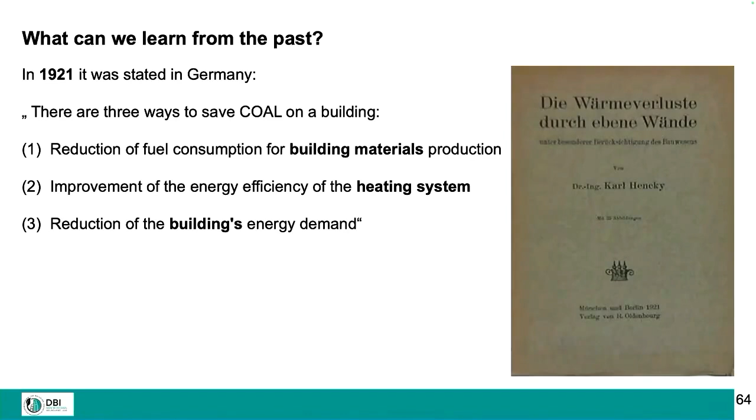But the question is now, what is new? If we go back to 1921, you can read in books in Germany, if you like to save coal, you have 3 options: use less coal to produce construction products, improve the energy efficiency of your heating system, or reduce energy demand of your building. 100 years ago, and construction products, so-called embodied impacts, are in place number 1.

In a certain way, we are always following a crisis. After World War I, there was a scarcity in coal, so we calculated with coal. Later on, there was the oil crisis, so we used oil equivalent. Later on, it was all about primary energy, non-renewable. And in our days, we are talking about global warming. So we can ask ourselves what will be the next crisis and what will be the next indicator. I think we will soon see raw material consumption.

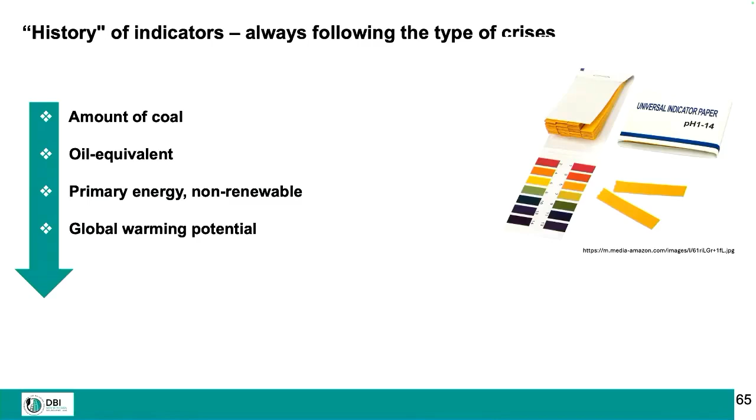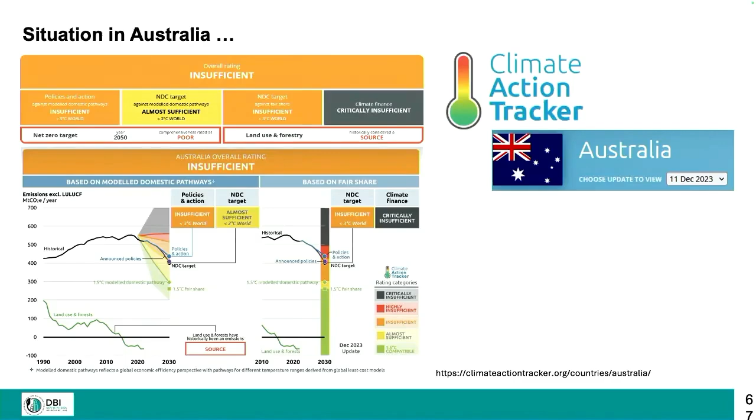And we are not on track. This is very clear, I must not tell you this. I am also not coming here to talk about problems in Australia. I'm coming here to explain the problems in my home country. So we are also not on track.

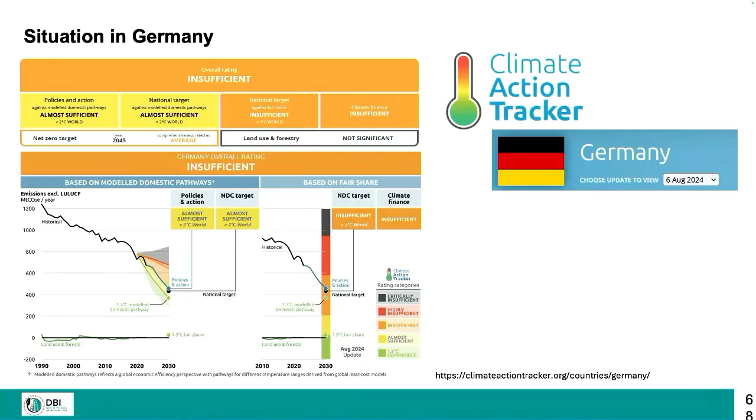This is the overall situation, and we are here representing a so-called sector, but I prefer the term area of action, because sector is a tricky term if you ask our colleagues from macroeconomy. There is no building sector in macroeconomy. We can talk about construction and real estate industry, or area of action, or area of needs like housing.

So in a certain way, we are the elephant in the room, the construction and real estate industry. Let us take the old term from the Beatles, with a little help from my friends. So we are the friends of the society because we have the potential to help by reducing greenhouse gas emissions. I'll come back to this in some minutes.

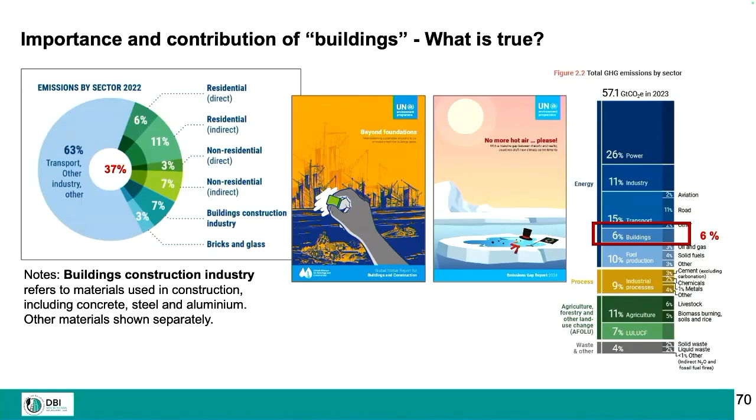But there is a certain problem of awareness. The same organization is telling us, construction industry is contributing 6% to global warming on the right-hand side, and on the left-hand side, it's close to 37%, including direct, indirect, and so-called embodied greenhouse gas emissions. So what is true? Most politicians know the figure on the right-hand side, saying construction industry doesn't matter much, let's take care of chemical industry, mobile industry, heavy industry, but just pour some buildings, it doesn't matter. But we can have impact. Let us not say we are not responsible. I dislike this. We are responsible for 37%. We can make an impact on 37%, and this is our role in this game.

But, dear ladies and gentlemen, there is a certain problem. Policymakers like to come out with years. And there is a race around the world, 2050, no, 2045, let's take 2035. But this is more or less fantasy. In reality, we have to follow the budget.

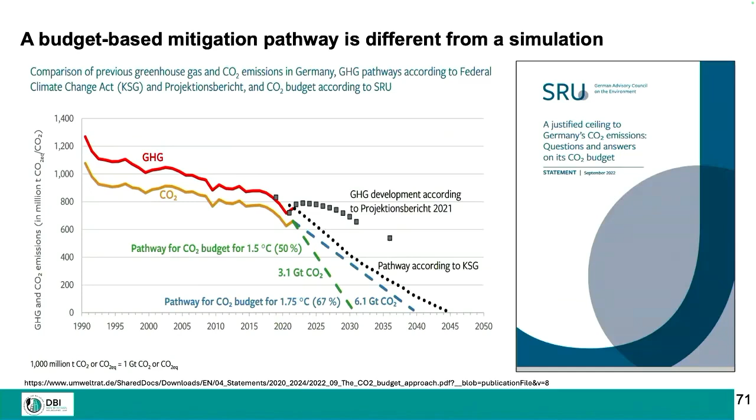This is a science-based approach, and we are here the researchers, so we should trust a science-based approach. And now, surprise, our budget is over, not by 2050, but by 2032. What happens? We have to speed up, ladies and gentlemen. It's a nightmare to say, let's take our time up to 2050, we go slowly, improving the methods, improving the data, improving the knowledge. But in a certain way, in 5 years from now, we have to come out with good results. This is our problem. We have to speed up.

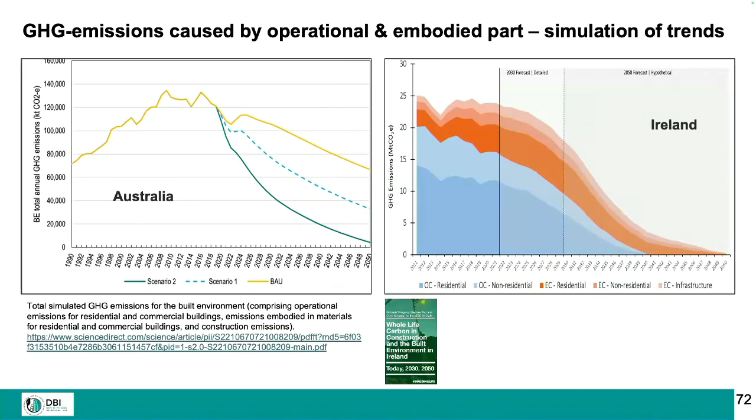And in Australia and in Ireland, take this as an example from Europe, we're doing things like this. We call this a mitigation pathway. But I'm not so sure this is a mitigation pathway we are talking about here. I'm sure this is a projection, a forecast, and not a mitigation pathway. By the way, on the left-hand side, Australia, this is just one example out of literature. If you like to see better examples, ask my friend and colleague Greg and his colleagues, his younger colleagues. They are working on this, and I really recommend his model. But at the very end, we must make a difference between a mitigation pathway and a projection.

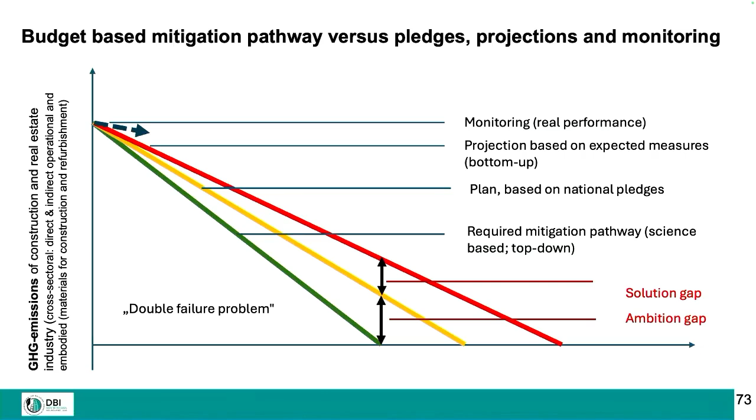This is a top-down approach, taking into account the budget. From the other point of view around the world, and at the moment we are right in time looking to the COP, yes, there are a lot of pledges, nice pledges. But at the very end, you can take a projection, and later on you will follow the monitoring, and always you will see a gap. First of all, there is an ambition gap, and later on there is a solution gap. In Germany, we call this double failure problem. At first, our targets are not strong enough, and secondly, we are not able to meet our targets. This is double failure. So again, we must be more powerful to solve our problems.

By the way, in Europe, there is a new law, a new requirement. If you talk just about climate friendly without showing figures, there is a legal risk, because now greenwashing is a legal problem. So please be careful if you come to Europe and give a speech about climate friendly buildings. You have to show the figures.

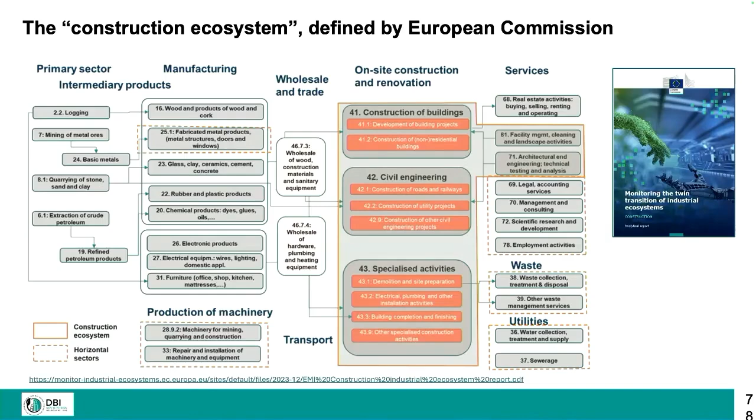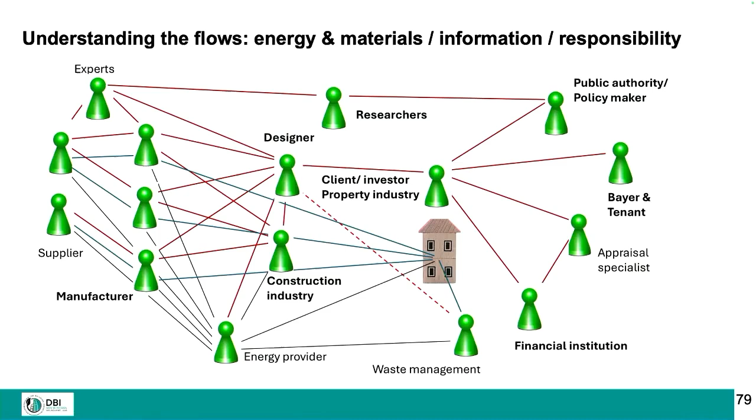So from my point of view, we should enlarge system boundaries to integrate all the actors and stakeholders taking the decisions. Therefore, in a certain way, perhaps it's better to talk about built environment professionals or things like this. In any case, it's a network of actors, and we will see a mass flow, an energy flow, but also a flow of information among the actors along the supply chain. There's for sure also a network of responsibility, and it's really necessary to fully understand this network.

We can also follow, on the left-hand side, the famous modules to describe the life cycle of a building. And we can add to this what type of industry is included: construction product industry, transport industry, construction industry, and so on. We have to fully understand all this, and everybody can contribute.

But who makes the impact? First of all, the consultants and the designers. But this is just the surface. In many conferences we discuss how we can convince the designers. But from my point of view, a more important question is how we can convince the clients, the sponsors, the owners, the investors, because they have to ask for low carbon building, they have to pay for low carbon building, and they give the tasks to the designer to create a low carbon building.

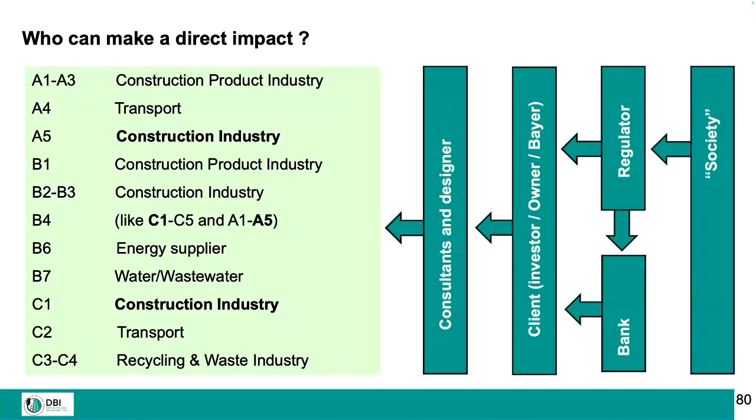But this is not the last line. Behind the investors, there are the banks. And translated into the bank world and language, unsustainability is a risk — a financial risk. And there are the regulators, and behind this, there is the society.

There was research done by Deutsche Bank in the past called 'Some Like It Hot.' This was a famous movie in the past. Perhaps most of you are too young to understand this joke. Nevertheless, I think it was related to Marilyn Monroe, far away in the past.

Look, construction and associated sectors can become double winner if we are clever enough, because what we need is transformation of national building stocks. If we do it right, and if there is a certain willingness to pay and willingness to act in society, this will create jobs. This will create income for construction and real estate industry. So if possible, we become winners.

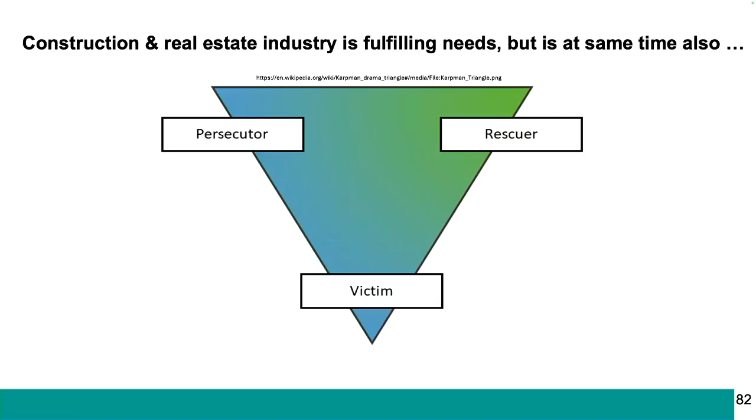We are in a very specific situation as a group here. We are the persecutors because we are causing energy and mass flow and impacts to the global and local environment. We are victims because we are already affected by the impacts of climate change on a local level. But because we have an impact on the 40%, we are rescuers also. Let's try to become a zero hero in society, the building sector.

So there are advantages from different perspectives — for the companies, but also for the buildings, and at the very end, for society. You can see here in Europe they now have a so-called Eurobarometer, and you can see on the company level, most companies, especially small and medium enterprises, are highly motivated in energy saving, minimizing waste, saving water, and others.

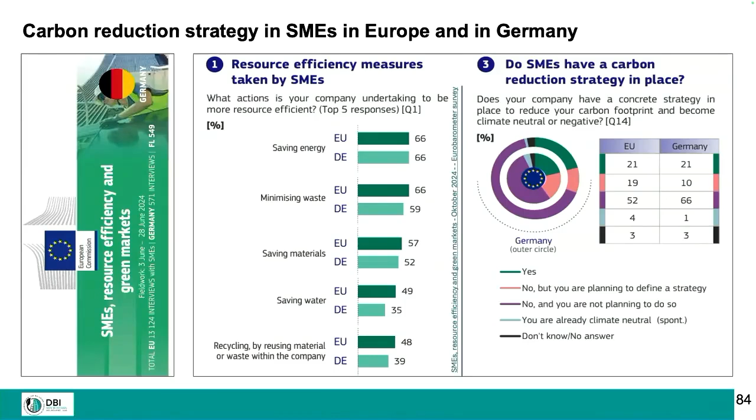Sometimes it's not enough to show the advantages to motivate people, to say green premium or not, I have enough income. So in a certain way, we should try to show the risk, because you make the real estate people nervous if you come out with the message that you will lose money. We call this brown discount.

So green premium is one thing, but brown discount is the other side, to say, if you have a high carbon building, an unsustainable building, this will create risk, but also financial risk. We call this brown discount.

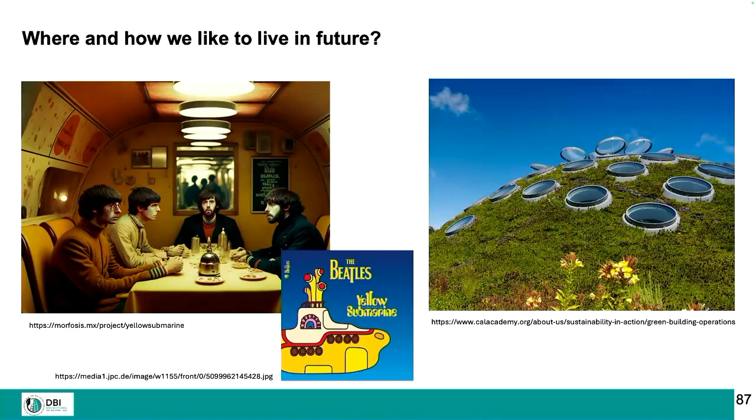And for sure we have to ask the people - if we have climate change in the future, perhaps we have to live in yellow submarines, but most people prefer to live in green buildings. But there must be a very clear language.

If you look to Europe, we have competing initiatives. One is zero emission, and the next one is zero emission. One is about greenhouse gas emissions, and one is emission on construction sites. This is not the same, but the same terms. You can see there is really a source of crazy mixtures of different terms.

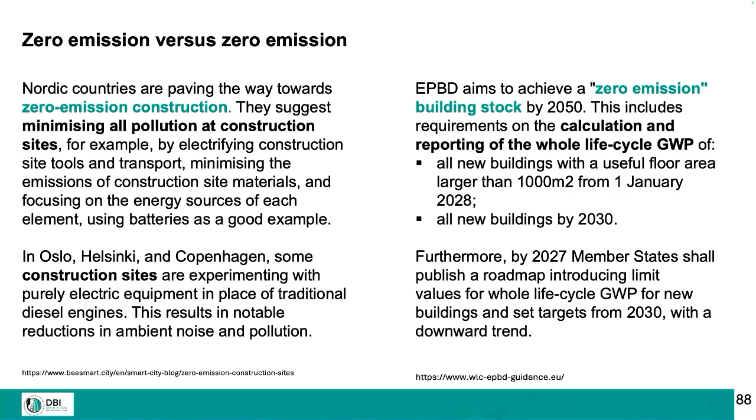So we really need clear terms and definitions to have a better idea of what we are talking about. And there is a new game around the world: let me coordinate all the others, because we need a harmonized approach. Different organizations at the moment try to come out with harmonized approaches, but who will harmonize the harmonizers?

You can see, typically if we talk about assessment methods, we have to talk about the modules, when to carry out the assessment, what is the reference study period, and things like this. And at the minimum we should fight for more transparency. There is also a good job sharing between legal requirements and standardization.

This too I recommend you learn from Europe - this job sharing, to say the legal requirements are on a more generic level. And for the engineers, all the details are part of a standard, because it's easier to adapt a standard than to adapt a legal requirement. So a legal requirement would be a framework.

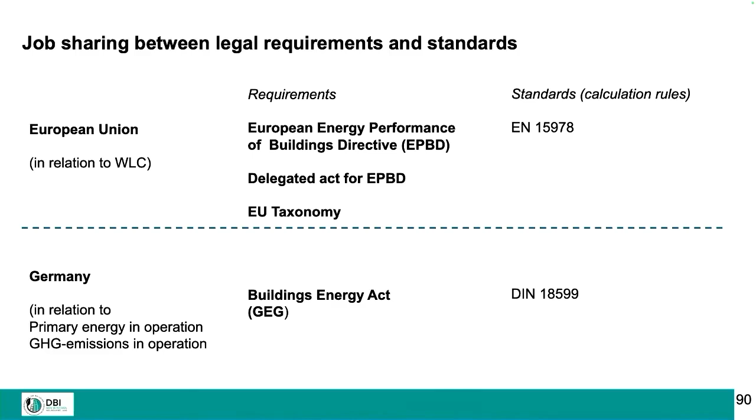And in Europe we will have some frameworks like this, especially the so-called delegated act, on how to calculate greenhouse gas emissions. But by the way, we can also learn from Europe: just reducing greenhouse gas emissions is not enough. We have to do this, and this was already mentioned by you, dear colleague.

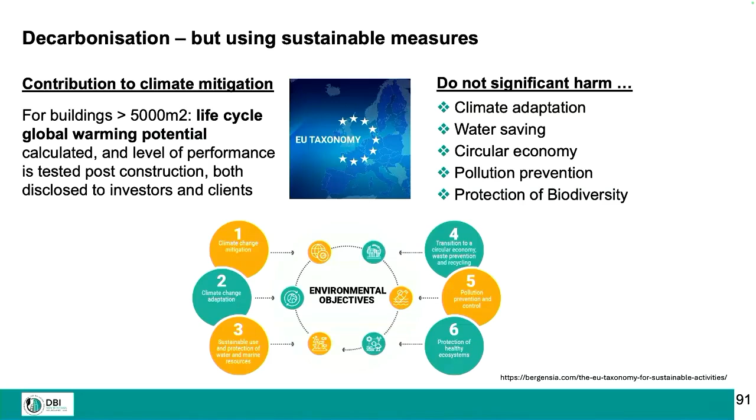We have to enlarge the scope, and include also the other perspectives, and say at the minimum climate mitigation is okay, but do not significantly harm adaptation, water saving, circularity, pollution prevention, and the protection of biodiversity - and we can enlarge this further.

By the way, dear colleagues from Australia, we miss you, because Greg, my friend, is here but not representing Australia. He is representing our iiSBE, the International Initiative for Sustainable Built Environment, the most powerful phantom organization in the world, able and ready to put on world conferences. The last one was in 2008, here in this town, coordinated by Greg.

So you see, it's all about standards and certification, and this is what we are talking about here also. It's all about demand creation, finance, and investment. It's very similar to your list of topics at this conference here. Again, we miss you, so it's not too late. The main activity will start next year in front of COP30.

At the very end, climate action is not enough, let us say, and this is also true for Buildings Breakthrough. Buildings Breakthrough wants nearly zero emission buildings, resilient to the new normal, but not by 2050 - by 2030. This is now at the international level, to say this is a self-commitment, to say let us speed up to achieve such a goal already by 2030.

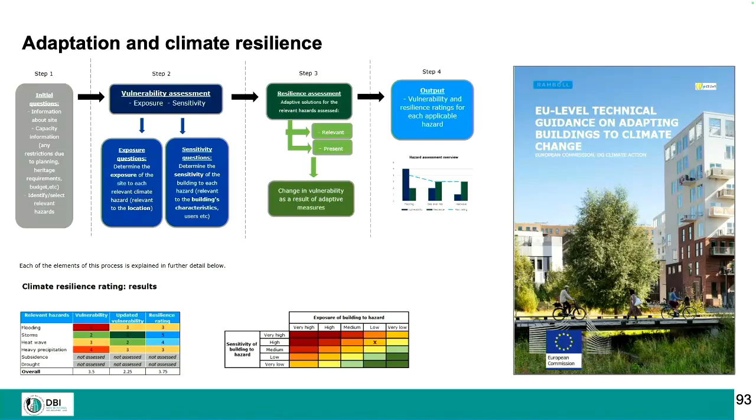So, ladies and gentlemen, what's next? We should, as researchers, already be two steps ahead of the actual list. You perhaps are surprised by my first line, but if you look at the economic and environmental value of the existing national building stock, you should take care.

You should maintain the environmental and economic value of the existing building stock. We need more regular maintenance. You have heard about Germany.

Bridges breaking down and falling into the river in a country like Germany - what a disaster, what a shame. Therefore, we need more maintenance and refurbishment.

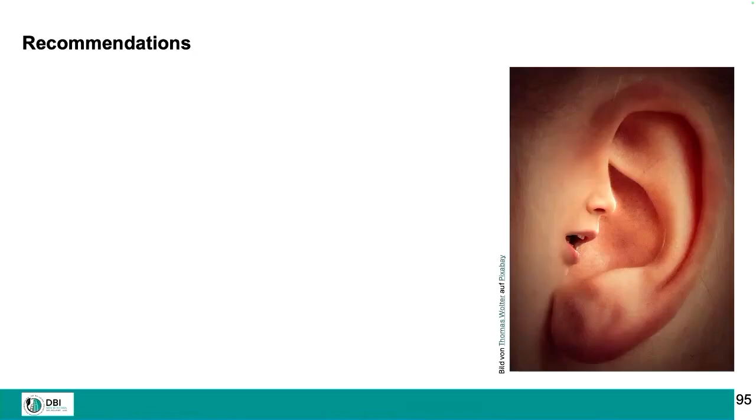And the next topic will become circularity, and some final recommendations. We must communicate the importance of the construction and real estate industry. We should go to the polluter-pays principle, because in national statistics we are source-based and not polluter-based.

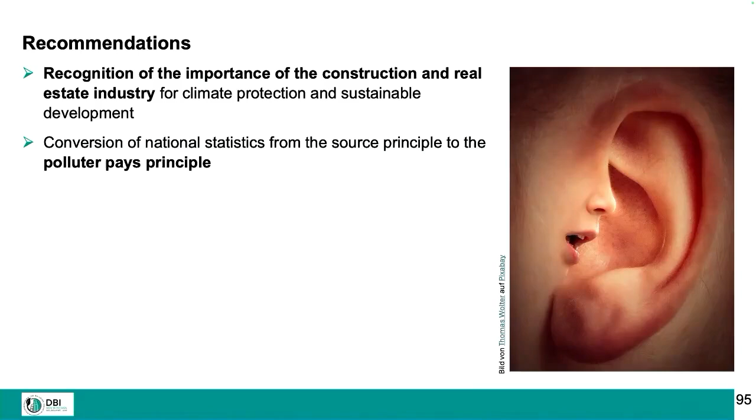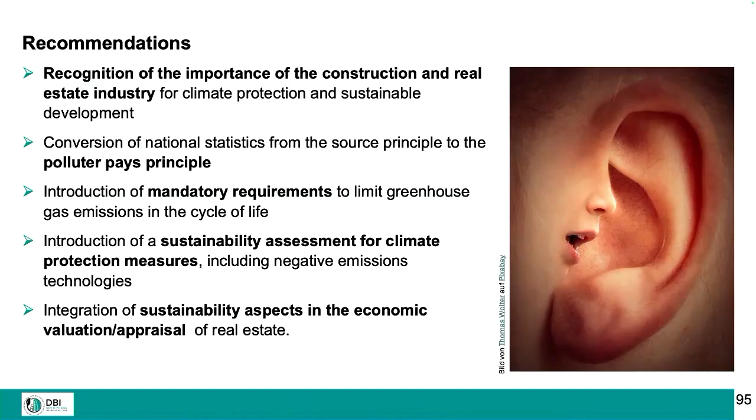We have to come to mandatory requirements to limit greenhouse gas emissions. We have to undertake a sustainability assessment for climate protection measures to see advantages and disadvantages. At the very end, we must integrate this into the appraisal process, and we should improve the digital information flow. In this case, the building industry can become a rescuer and winner.

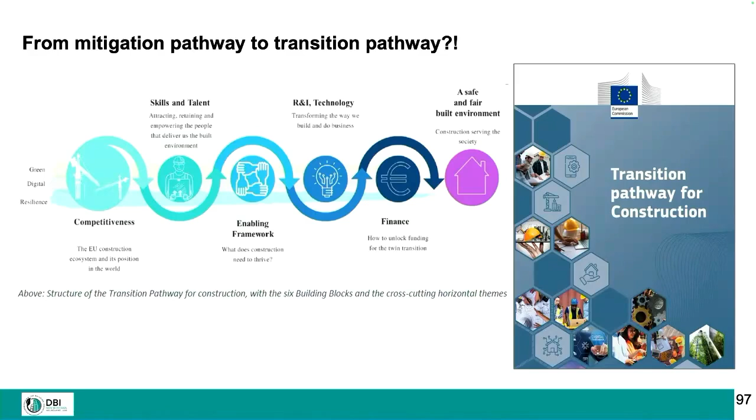But a final remark: this is not the only target. We should go from a mitigation pathway to a transition pathway to achieve, at the very end, a safe and fair built environment. And this is just much more than climate neutrality. So this is our long way.

And I will hand over to Harper now, but allow me a small joke: if we are able to achieve this target, we can show each other our personal SDG flag. I get this especially from my kids to motivate me, and so I like to motivate you. Thank you.

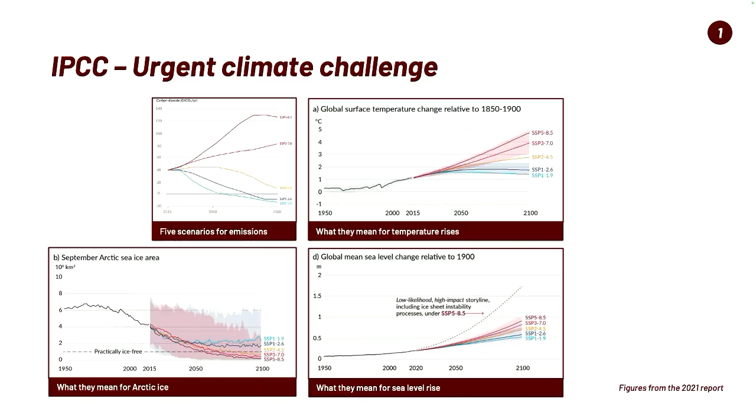We know these are serious scenarios we are looking into - scenarios that have always seemed far away in the future. But what we are facing now is that they are not that far in the future. During this time there have been a lot of actions or discussions, but not resulting in enough action to change the curve.

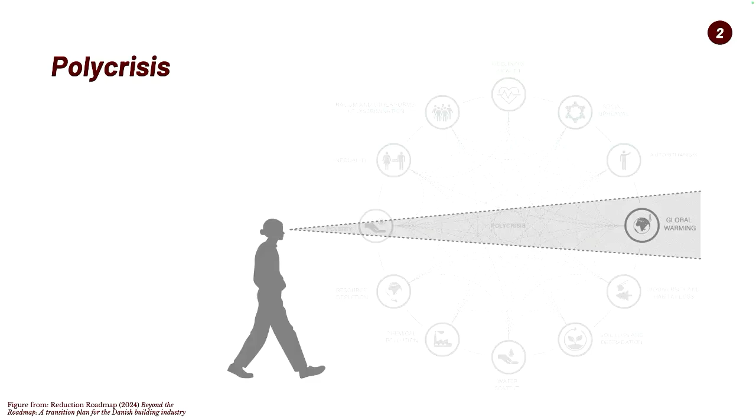While we are looking at this climate urgency, which is quite complicated, our ecosystem is much more complex, and we need to make sure we don't only focus on climate but also on other environmental aspects. Therefore, the planetary boundaries have also been introduced, and we look into the health of the whole ecosystem through them.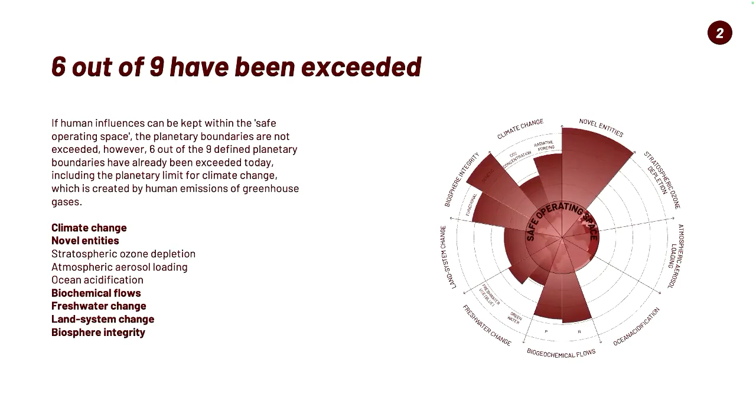To maintain the health of our ecosystem, we need to keep our human activities within the safe operating space. But as of now, 6 out of 9 planetary boundaries have been exceeded due to our human activities, and we need to look into possibilities for how to reverse this and stay within the safe operating space.

The planetary boundaries, as defined today, are very good, but they do not totally cover our resource use. One way of trying to illustrate and measure our use of resources is the Earth Overshoot Day, which looks at the use of natural resources and how much we are using.

We should be using the amount of resources that keeps our planet in balance. In Denmark, the Earth Overshoot Day is March 16th this year - 12 days earlier than the year before. In Australia it's April 5th, and globally it's August 1st. So after 7 months of the year, we have already used the amount of resources we should use for a whole year to have a healthy, balanced planet.

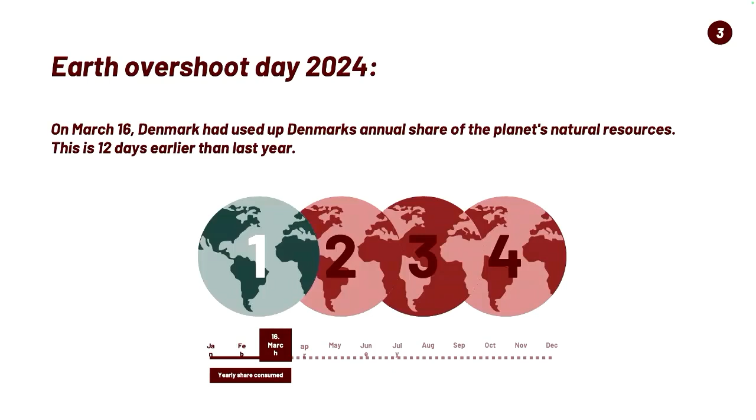Also, in Denmark we already have legislation for new constructions on the climate issue, so you have a ceiling on the embodied carbon or whole-life carbon you can emit from new constructions. This is a recent legal requirement in our building code.

Being among the first countries in the world working with this, perhaps you could say we are a little bit ambitious, because it's ambitious to set limits on how much carbon you can emit from buildings.

It is ambitious to work on reducing your emissions compared to what you have been doing when you're building as usual. But when we look into our emissions from buildings and compare it to the budget we have for construction to fulfill the Paris Agreement, then even with ambitious requirements like in Denmark, we are exceeding the Paris Agreement budget for buildings by around 220%.

So although we are not on track in Denmark, I'm very thankful that I can still be invited to tell a little bit about our whole life carbon journey for the building sector in Denmark.

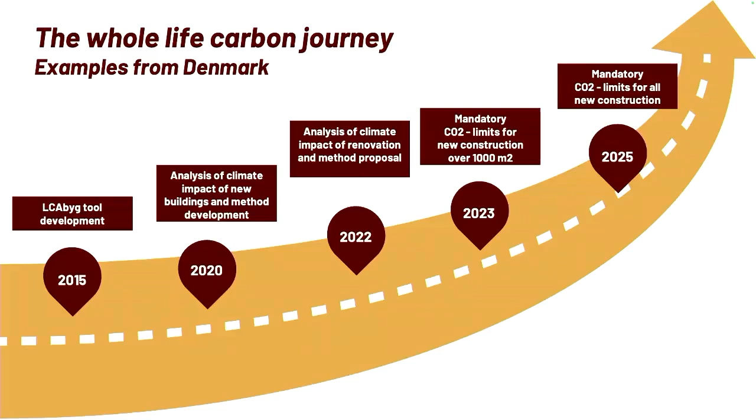In the past, there has been a lot of focus in Denmark on reducing energy consumption in buildings, with ambitious requirements for energy use. Over the last 60 years, there are really good results in these requirements. I won't discuss further how people tend to use more energy than intended once they use the building, but let's keep that aside.

But now the focus is on the entire life cycle of a building. Looking at how this has happened in Denmark, it has been like a 12-year journey with focus on life cycle assessments in building.

Around 2011-2012, the Green Building Council in Denmark was established, as happened in almost all countries. But what was chosen in Denmark was to use the German certification system for buildings, the DGNB system. What was special about that compared to many other systems used in Green Building Councils is that you have to conduct a full life cycle assessment of the buildings.

So for about 12 years, there has been experience with the use of life cycle assessments in some parts of the building industry in Denmark. Not all, but a lot of data have been gathered.

There have also been initiatives from the government. First in 2014, there was an ambition to introduce a sustainability class in our building code. This was a vision, but it also meant we started developing a tool for LCA of buildings, and we launched LCAbyg, our national tool to make LCA of buildings.

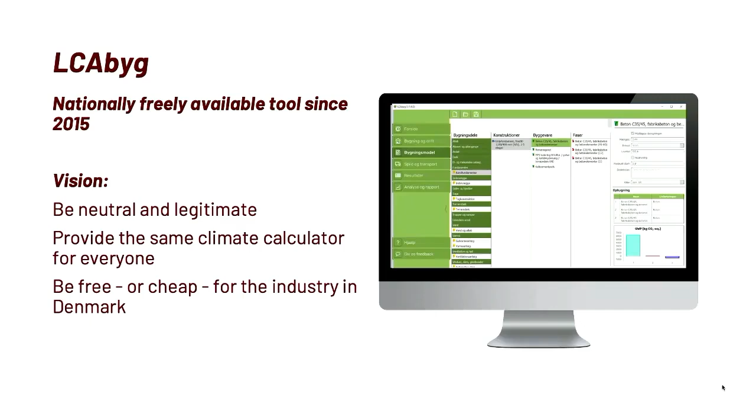Also, what has been important for us is to gather knowledge on the climate impact of new buildings. A lot of focus has been on new buildings, and one of our tasks at the university was to establish sufficient data background on climate impact of buildings in Denmark over the life cycle, to prepare for these legal requirements that had been introduced.

So in 2020, we had this report with 60 building cases. It doesn't sound like a lot now, but at that time it was quite a lot, also when you look internationally.

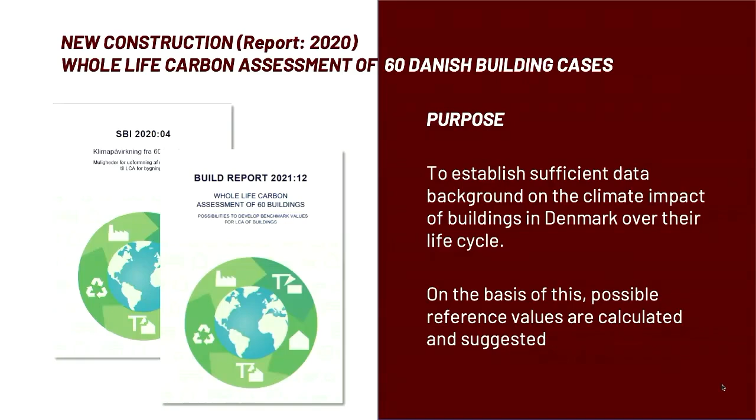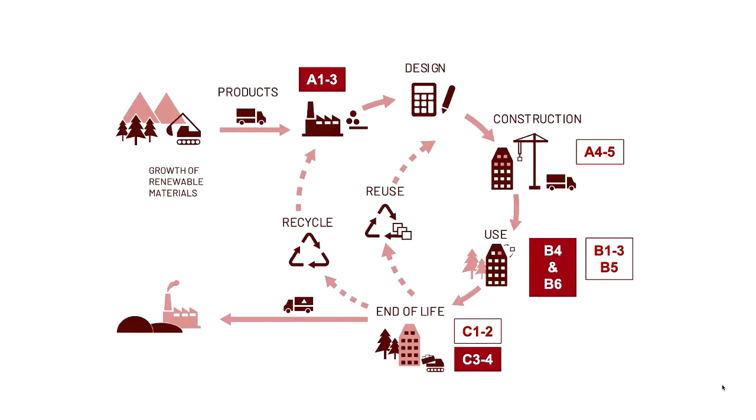You were introduced to these life cycle phases and modules earlier, and we make some simplifications in our methods in Denmark. The red ones show the ones we are including at the moment in our calculations. The results of the 60 cases show a variation across different building types, from around 6 kilograms to around 14 kilograms per square meter per year, calculated over a 50 year reference period.

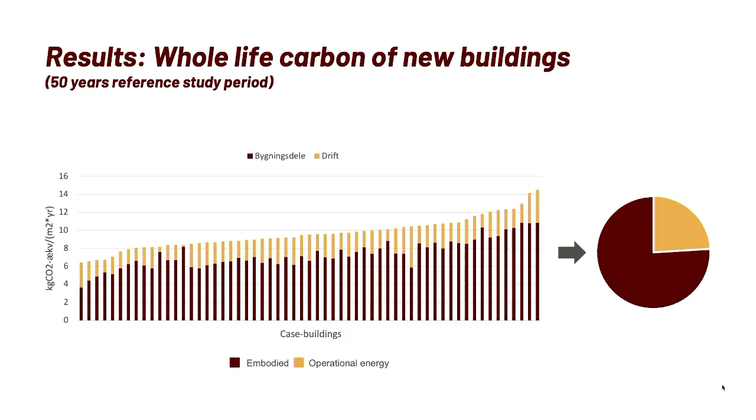What you can also see from this figure is that around 75% of the emissions in Denmark are coming from the materials, while around 25% is coming from the operational energy, when we calculate over 50 years. There are a lot of details here that I won't be able to dig into, but we have a lot of reports available, also in English, to look into this.

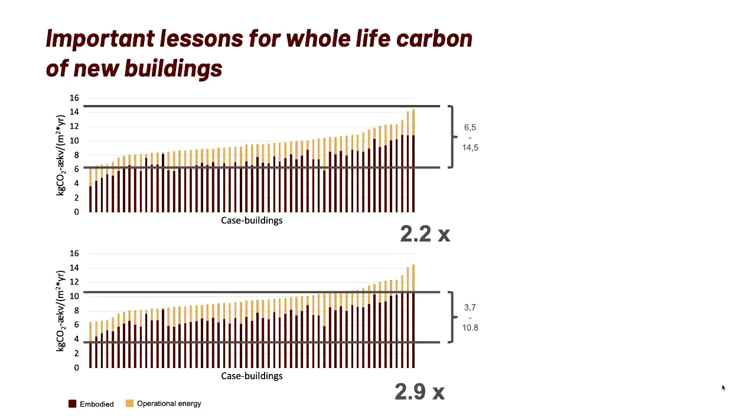What we learned from this is that there is a lot of variation, so there must also be a lot of potential to reduce the impacts. When we look into the embodied impacts, which we did not look into earlier because the focus was on energy, we can also see a huge variation. So there must be some potential to reduce here.

This legislation was introduced in 2021 but started two years later, in 2023. They had the same vision as they'd been working with for the energy requirements: have the goals start in 2023, but know they will be strengthened every second year. The red line is also there because we hope we will have a lot of ambitious actors in the building industry in Denmark working with these voluntary, lower CO2 limits.

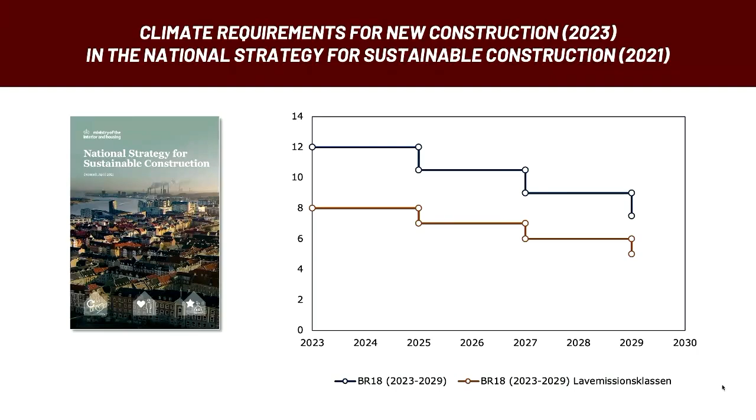That has been introduced, but we don't totally know yet, although we have almost 2 years with this, the status of how many are fulfilling, for example, the voluntary class. So just looking into our 60 cases and the level of the limit values: the limit value was chosen in 2023 to be 12 kilograms CO2 per square meter per year.

Looking into the data, you can see that almost all of it, 90% of the buildings we had calculated, could fulfill that. But knowing that a huge part of the industry did not yet know how to make an LCA, there has been a lot of discussion: is this ambitious enough?

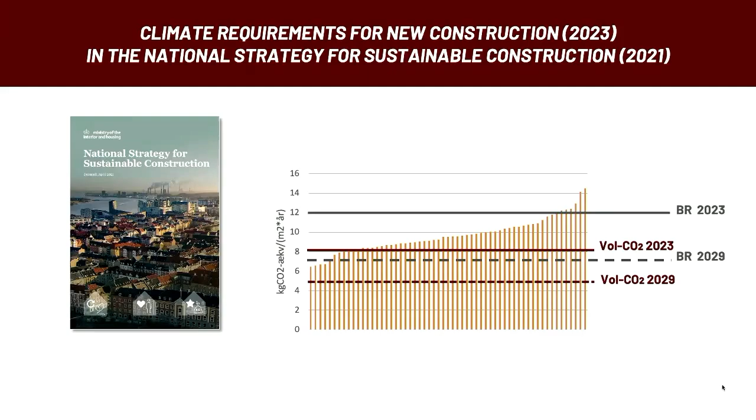If you recall the 220% exceedance I told you about, how we are exceeding the Paris Agreement budgets, then of course it's not ambitious enough in terms of climate. But in terms of knowledge in the building sector, it's perhaps ambitious, and this is what they were aiming for in the future. Remember this 12 kilogram CO2 per square meter per year figure, because I'll show you some numbers afterward. Then we have to prepare for the 2025 limit.

So we also published a report last year where we now have close to 300 cases, and you can see a huge variation in our numbers. But what we needed to look into was what is typically built in Denmark.

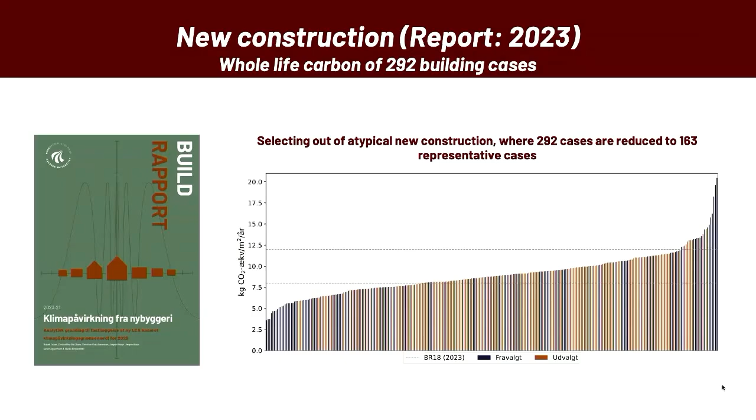So here, the orange ones are the ones typically built in Denmark, and the blue ones are some good cases, but not representative of what is being built when we look at the whole building sector of Denmark. So we have a set of 163 representative cases.

Now look at the numbers again. They are the same as we had for the 60 cases, from 6 to around 14, actually the same range as we had two years earlier.

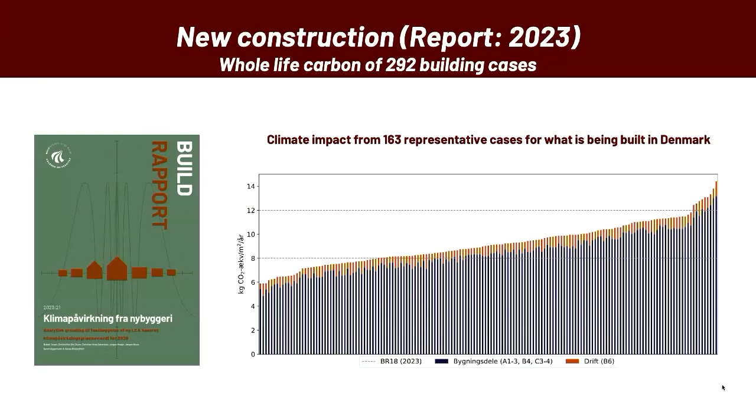But what you can see is that we have some new data that we're calculating with, both updated data on operational energy, the orange one, and also on materials. So we can see now with our new data, only 10% is coming from operational energy and 90% from materials. So the focus in Denmark, due to renewable energy in our energy supply, is on the embodied impacts, but of course we should also focus on our energy use in buildings.

We can now, with more data, divide it into different building types. We could not do that as much with our 60 cases.

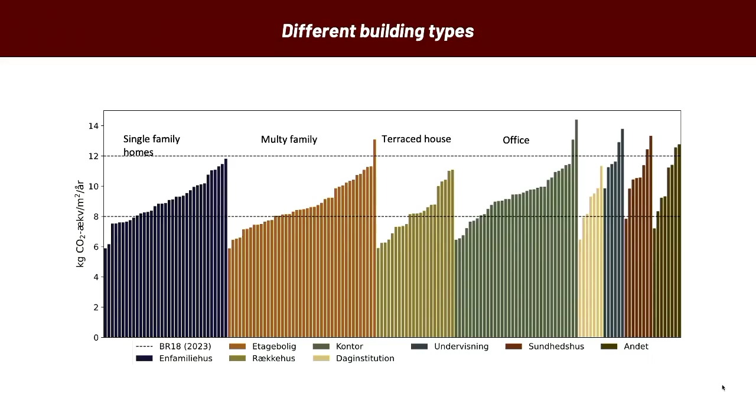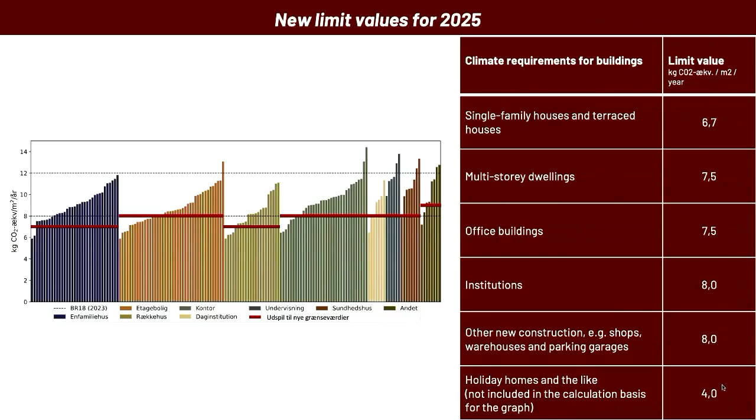Then we had the political negotiations for the limit values for next year, 2025. The value was going from 12 to around 10.5, but this will be the new limit values. A lot has changed. When we look into our representative case studies, only 15% of our cases can fulfill the requirements we will have next year. So a lot has to happen in the building sector in Denmark.

Why did this happen? The goal of 10.5 was partly due to a lot of pressure from the industry. Thomas mentioned the reduction roadmap—around 600 companies were supporting it, saying we really need to focus on our limited budgets. So there was a lot of pressure on the politicians to go much lower. This will be the limit values from next year.

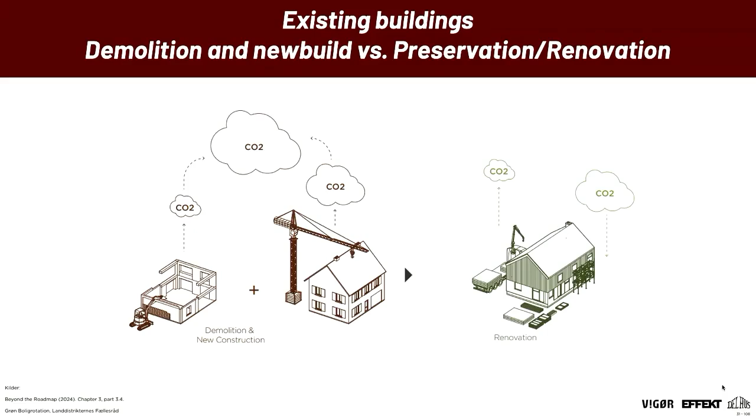So this was about new buildings. Existing buildings is quite important too, and we need to really focus on existing buildings to avoid demolition and new builds, and focus on preservation and renovation or retrofit of our existing buildings.

We have some research on this—not too much, I have to say, but it's quite an important topic. Our research shows it's better to preserve our existing building stock and renovate it. It will be better for whole life carbon, for upfront emissions, and for resources.

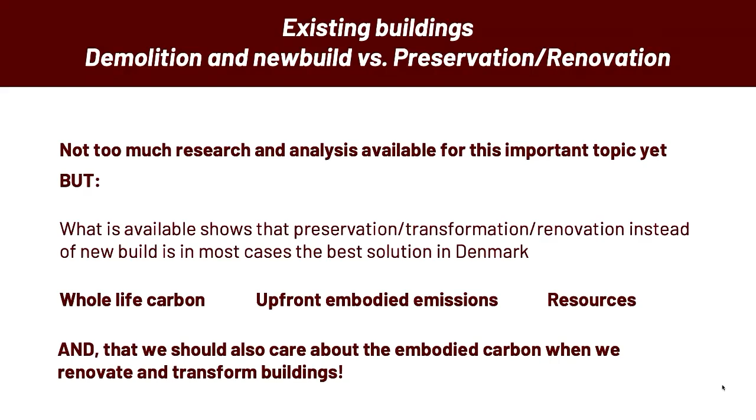We have also made some reports focusing on how we can have legal requirements on embodied carbon when you renovate, because we can see from our cases that there's a huge variation here too. But this has not been decided yet, it's still not in the building code. So I will not go further on existing buildings, although it's a quite important topic.

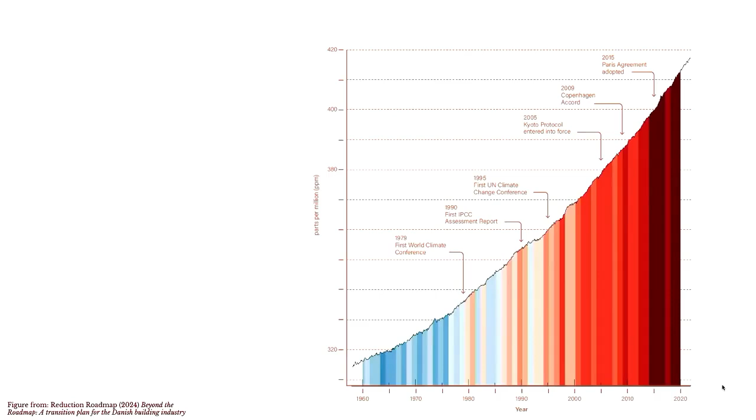But our serious urgency—what can we do about this for buildings? We can do what I've been talking about for the building code, but we really need to talk also about sufficiency and absolute targets. We need to talk about consumption of space, the use of square meters. That is not affected at the moment by the building code.

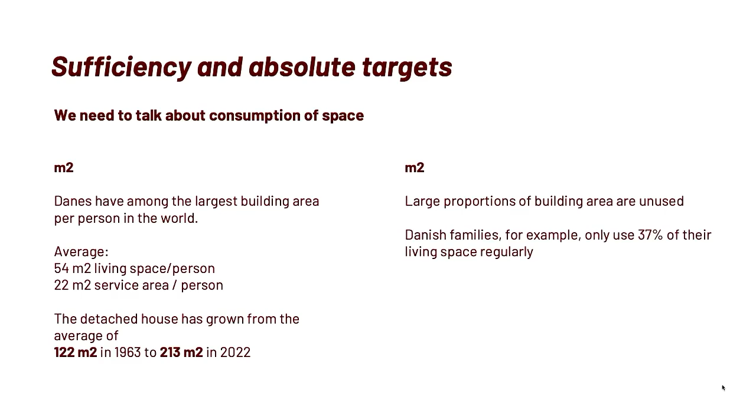If you just look into Denmark, the personal use of space is quite high—54 square meters per person in living spaces. For example, just for the single family home, it has increased from 122 to 213 square meters over a period of 60 years. So there's a huge development in increased use of space, and we are not really effectively using our space. That's what we need to talk about.

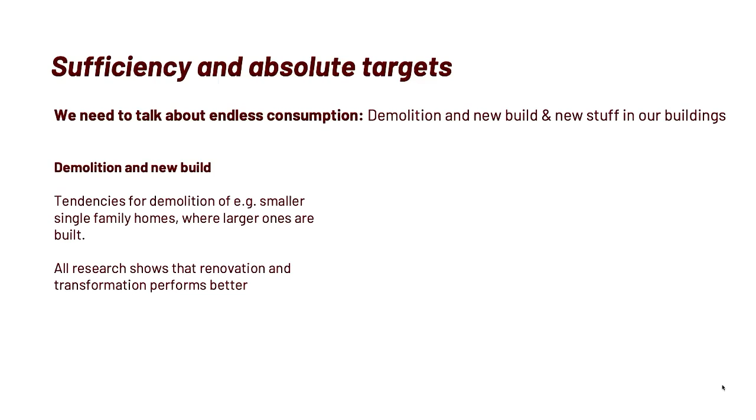We also need to talk about our consumption—there's a lot of focus on that. There is a lot of demolition and new build taking place in Denmark, with tendencies for demolition of, for example, 50-year-old single family homes that are smaller, where larger ones are built at the same place.

There are also things not covered by our building code but still affecting our emission numbers. For example, kitchens that on average are renewed every 11th year, which is totally below the technical lifetime of the kitchens.

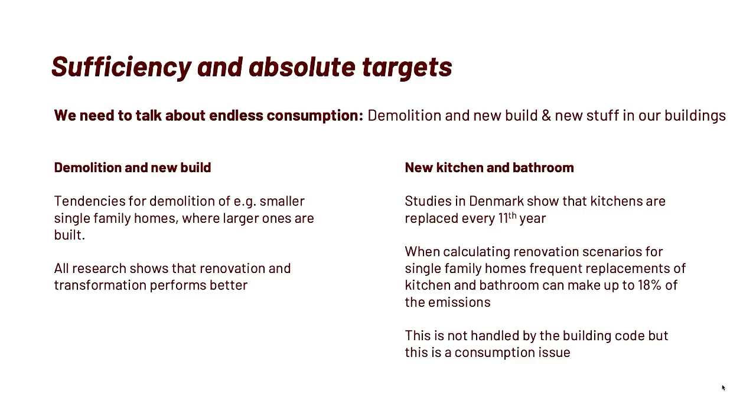What we need to focus on are absolute targets, going from just reducing the way we build today to focusing on having absolute targets.

One example of absolute targets: if you're fulfilling the Paris Agreement, then we know what budgets we have left, and we need to try to scale that down to a person in Denmark, and scale it down to the buildings, how we can work with that for a square meter of building.

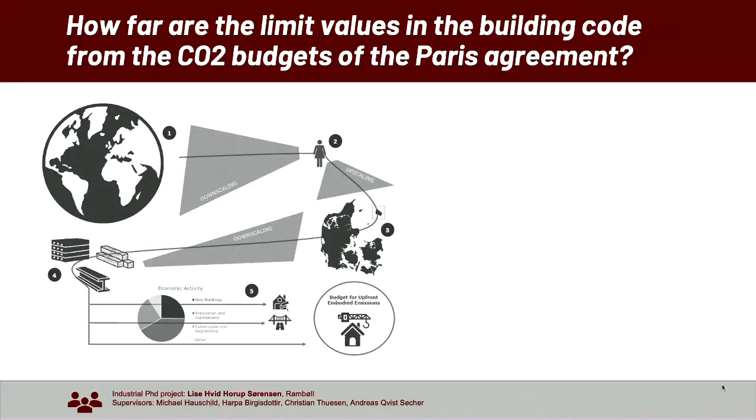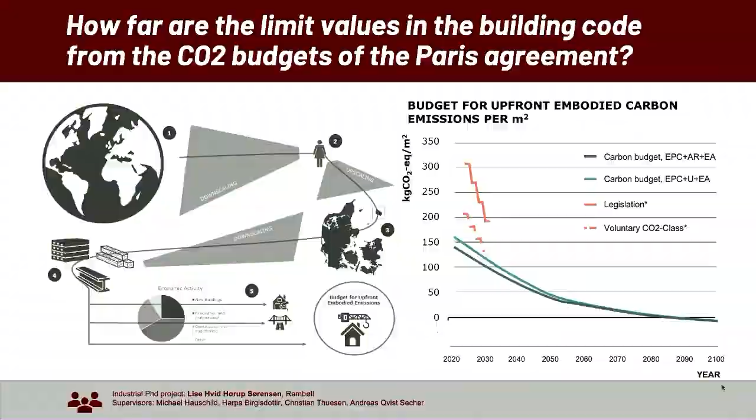We also have another very important project in Denmark called 'Residential Buildings from 4 to 1 Planet,' which argues we at least need to reduce by 75%, and actually we need to reduce even more.

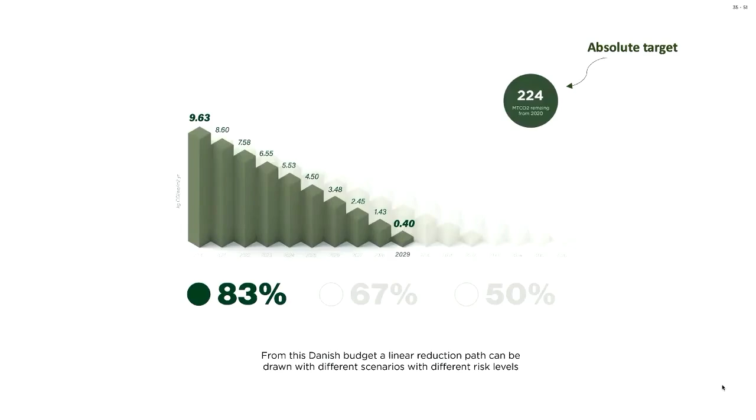The reduction roadmap has been one very important part of that, where we're looking into the absolute target that we have and how we need to reduce. This reduction roadmap has had quite an effect in Denmark.

In this same project, we also had the opportunity to study the potential we have in residential buildings to reduce the climate impacts. We studied a lot of green case studies and compared them to conventional ones, and we can see there are a lot of potentials to really reduce the climate impacts of buildings.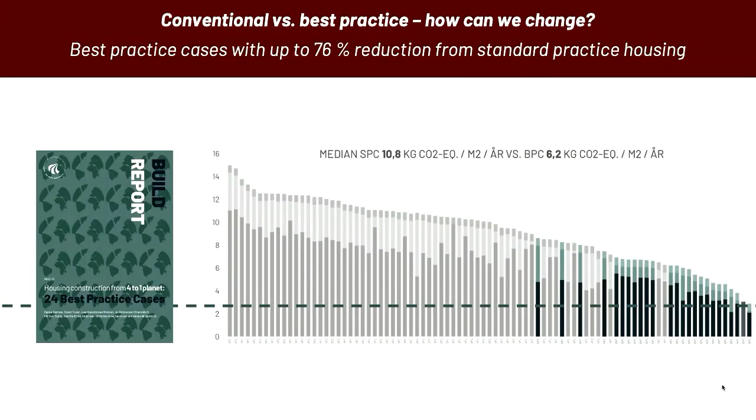There are a lot of best practice cases out there, real building cases that have been built with much lower carbon footprint. But these are just a few cases, and they are not yet becoming conventional practice in Denmark.

This is how they have been mapped. The crosses are the cases, showing how they've been mapped into our reduction roadmap. So we can see that it is actually possible to be on the path.

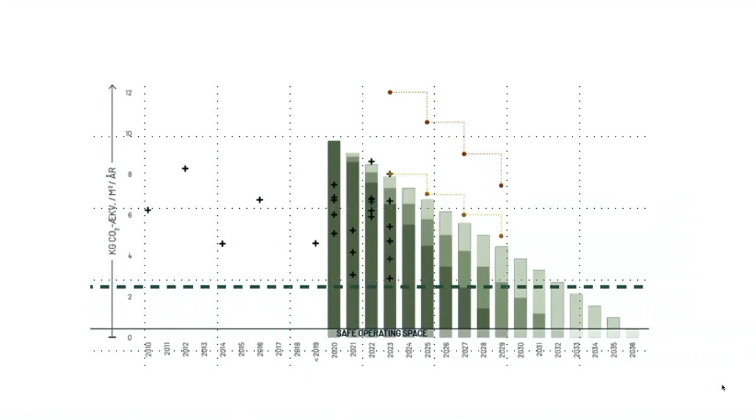We don't have the solutions to be in the safe operating space, or to be under the goal of this project, which is 2.5 kilograms CO2 per square meter per year, but we can get close to that. And just from this week, there are different projects coming on the market in Denmark saying they've figured out 2 to 6-floor building cases that can stay within 4.7 kilograms CO2 per square meter per year.

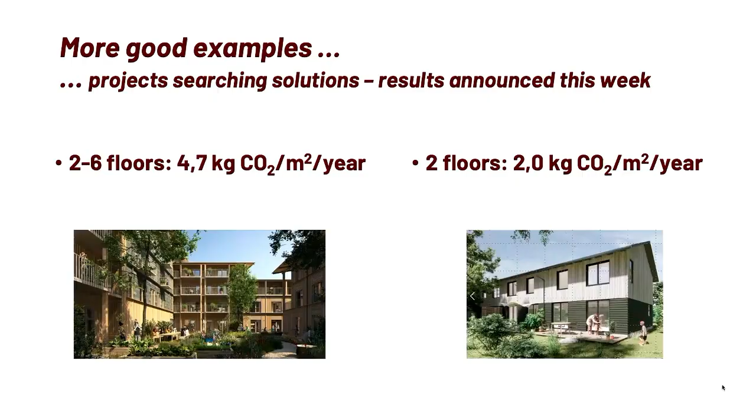And the newest one, 2 floors with 2 kilograms compared to the legal requirement of 12. So there are a lot of good stories happening, but we need to figure out how to move from conventional to best practice. And I need to speed up.

My focus from now on will be on how we can be building within planetary boundaries. We don't know the status yet of where building within planetary boundaries is, and we also need to find solutions for how to stay there. So I will speed up.

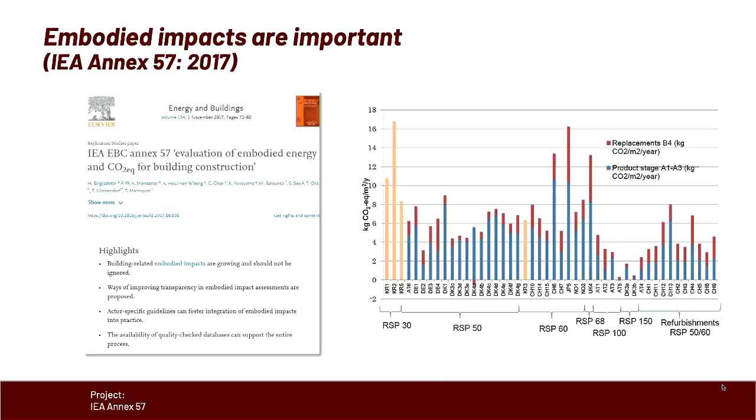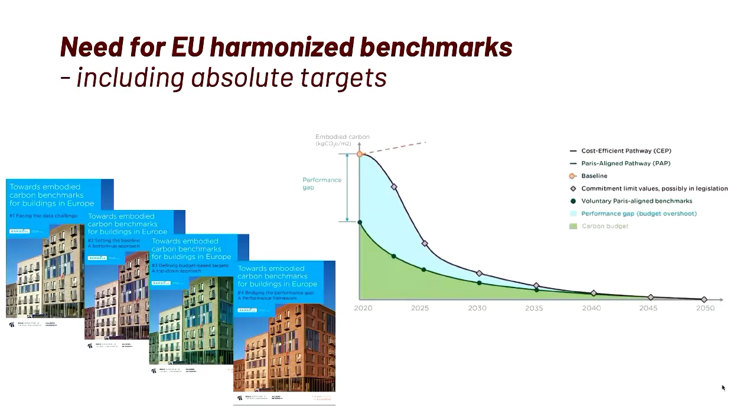I just want to mention, as was said before, the importance of international cooperation and harmonization, and we have been participating in many of those projects. For me, it has been quite important to be a part of this, because it gives a lot of input to the development in Denmark, being able to have this cooperation on an international basis.

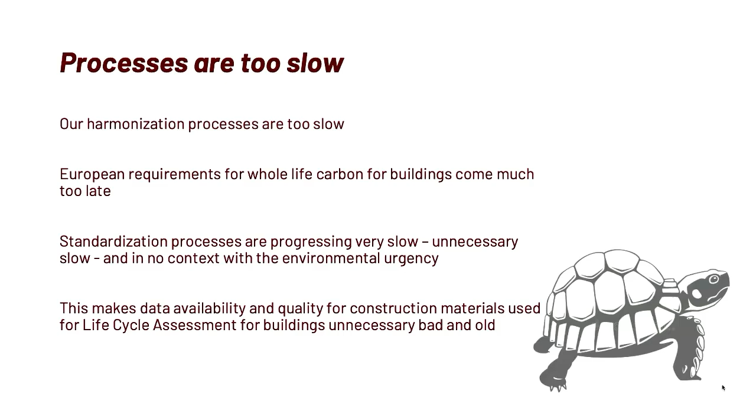But what I have to say is the processes are still much too slow. Our harmonization processes are too slow. The European requirements for whole life carbon buildings come much too late, aiming for 2028 or 2030 and so on. The standardization processes are also progressing very slowly, and it affects the data availability we have for our LCA requirements. So we have to figure out a way to face this urgency, and how to change our processes to work with it.

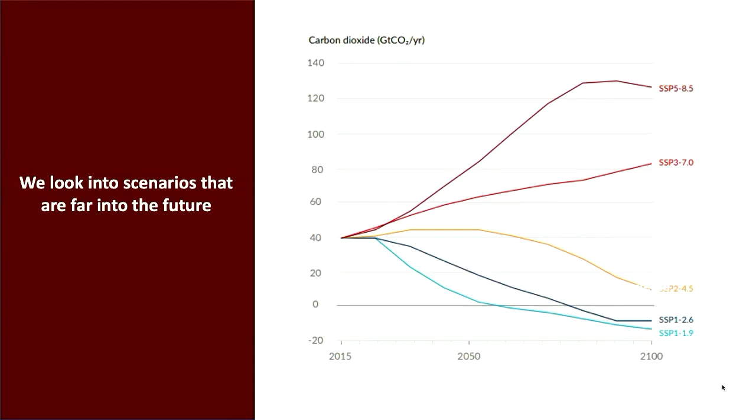Finally, we look into scenarios very far in the future, looking into the year 2100. We are looking into buildings with reference study periods of 50 years, and lifetimes that are much longer. In a way, it looks very far away.

But on a personal note, we have to figure out and talk about whether climate change in the future matters for us. I'm going into literature, Icelandic literature and so on, looking into when someone you love is still alive. If I'm lucky enough to become 90 years old, I will have more than 40 years to love my children. And if my children become 90 years old, they will still be alive in year 2100.

And if I become a grandmother, maybe in 10 or 20 years or so, I will be lucky to love my grandchildren for 20 to 30 years. And if they become 90 years old, they will still be alive in 2130.

When we think the scenarios in the IPCC reports are very complicated and telling something very far in the future, we have to remember that how we impact the future does affect the ones we know now and love, and the ones we don't know yet but will love. So we still have a choice today, and that is why we still have to keep fighting for changes.